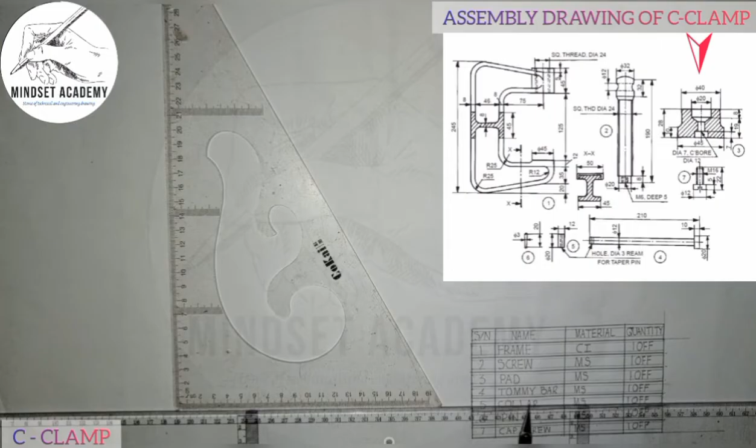Now item 2, where my arrow is pointing, is the screw, made up of mild steel, and we have one of it. Item 3 is the pad, made from mild steel also, one of it. Item 4 is the tommy bar, made from mild steel also.

Item 5 is the collar, from mild steel. Item 6 is the pin. And we also have item 7, which is the cap screw. All are made from mild steel except the frame, which is made from cast iron. And we have one each of these different items.

Now the first thing we'll do is draw our vertical line. We'll start from item 1, which is the frame, where my arrow is pointing, and I'll draw a vertical line this way from here. Faint line first, you can see that. If you look from here to here in the diagram, I call it the total height.

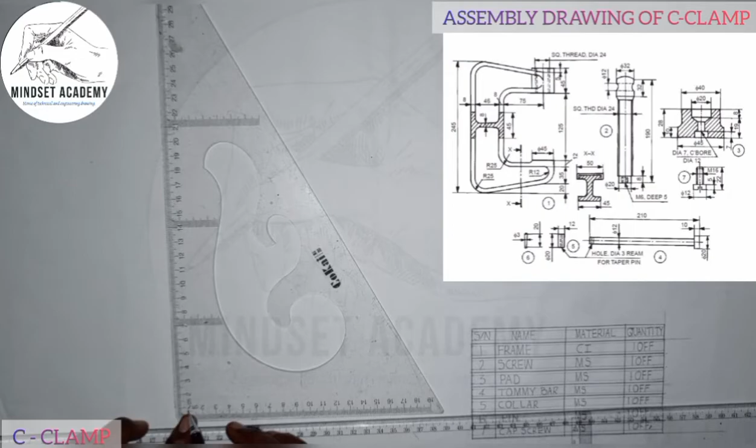It is 245. I'll start from here and measure my 245 upward. So if I'm starting from 1, taking my 1 to be 0, if I start from 0, I'd have stopped at 245. But since I'm starting from 1, I'll stop at 255 at this point here.

So 0 to 245, or 1 to 255. So this is the height, this is where I'm stopping here. So I will take my set square and draw a horizontal line here also. I'll come here also and draw another horizontal line too.

You can see that. Now the next thing is the total length. If you count from this point to this point is 8. From this point to this point is 45. And the next point is another 8. So 8 plus 8 is 16. 16 plus 45 will give us 61.

Now the next one again, from here to here, is 75. So 61 plus 75 is going to give us 136. Now that is to this center here, and we know that half of the center from here to here is diameter 45. So half of 45 is 22 and a half. So 136 plus 22 will give us 158 and a half.

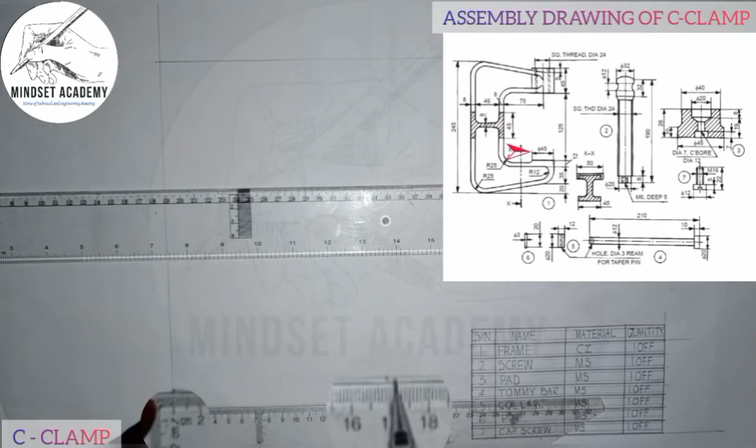And I will close it up this way. And I'm going to close it up this way.

So this is the form out of the box here. If you look at this closely, the thickness between here to here is given as 8. So I'm going to measure 8 from this point to this point, given to be 8. So this is my 8 here.

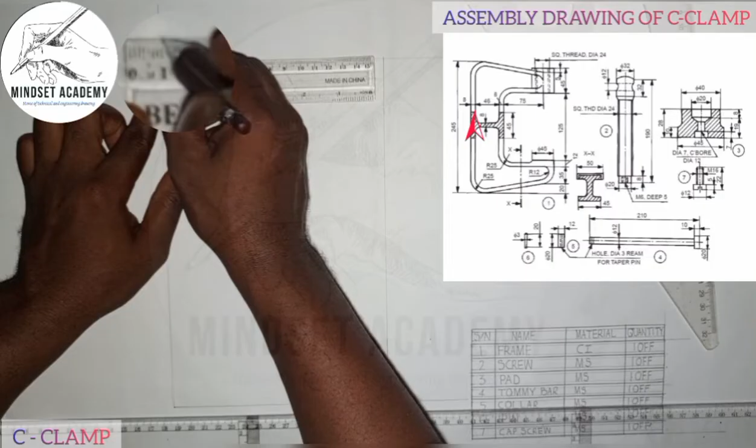You can see that, that is the height to have. And I am going to close it up. So from here to here is the 8. And I'll close it up. You can see that.

Now the next thing is, if you check from here to here, it's given to be 20, and I'm going to measure 20 from this point to this point, 0 to 20. And after that, I'm going to measure 35 again from this point.

Then I'll measure 12 again, from here to here. This is 12.

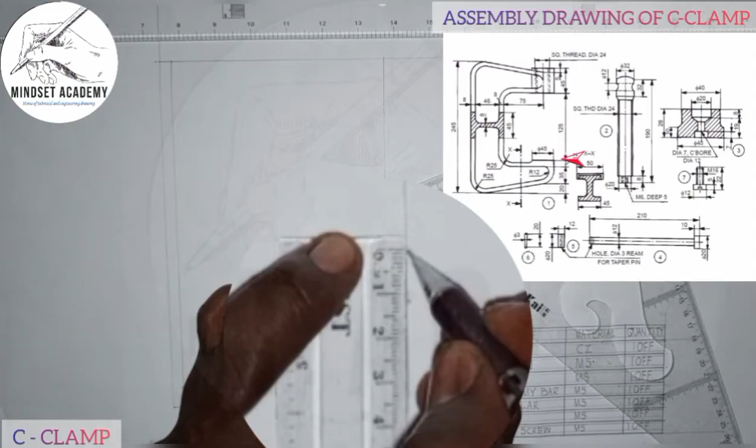So with what we have here, I will just draw my horizontal line this way, just a faint line first of all. So this is what we have here. Is that okay? So if I've done that, the next thing I'll do is this.

From the base here, I'm going to measure another 8, from 0 to 8. So this is 1, this is 8 here. This point is 8, right?

Now if I've done that, measuring the 8, this is what I'll do, and I'll take it to touch the point 20. I'll take this end here to touch the point 20.

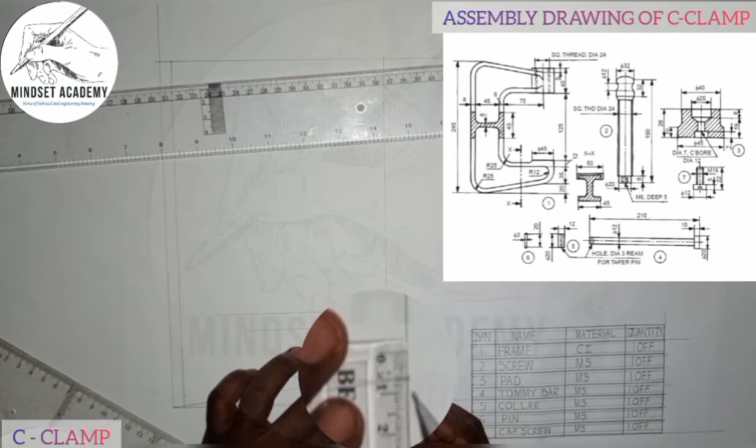You can see that. And I'll measure another 8 again here, this point, because the thickness is 8. So I'll measure 8 here. This is 8, right? And I'll measure 8 here too. This is 8. And I'm going to join those 2 points here.

You can see that. Now if you notice it, there's a fillet, it is not sharp. And we're giving the radius of this curve here to be 25. So I'll measure 25 on my meter rule this way, from 0 to 25. This is what we have here.

Alright, and I'll place it at this point here. At this point, I'll mark 25, and I'll mark here also 25. With the same radius, I'll place it on that point. I will strike an arc. I'll place on this point, I'll strike another arc again. You can see that, so where they meet at this point, with the same radius, I'll close it up.

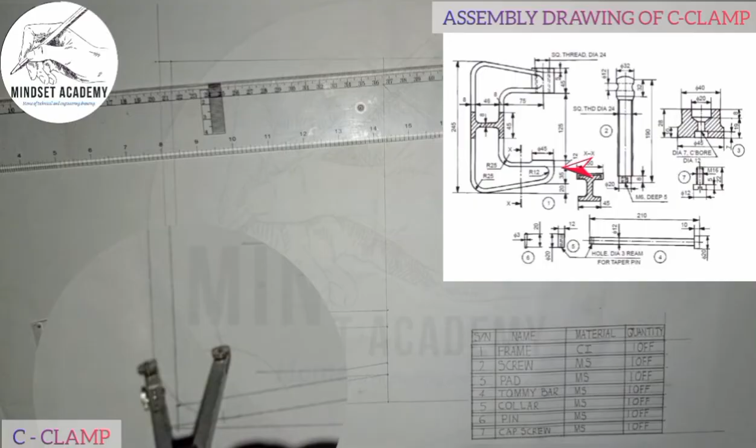So you can thicken it. You can see that. The same thing that I did here, I'll do it here too. From this point where they meet, I'll strike an arc here. I'll also strike another arc here. So where they meet here, I'll strike an arc. At this point here also, I'll strike another arc. So they are meeting at this point here, right?

So the radius of this, I'll take it here. I'll do the same thing.

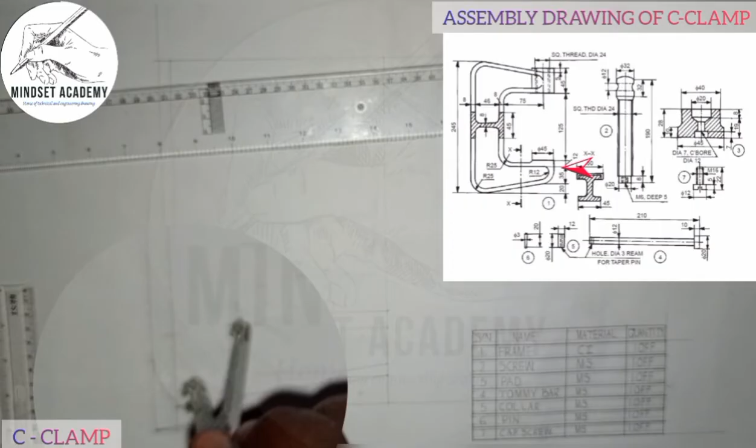You can see that. And if you check the diagram very well, at this point too, we also have what is called a curved fillet. Is that taken? So at this end point with the same radius, I use 25 here, and I'll come to this point where it intersects.

I'll mark 25, 25. Where it meets, I'll strike an arc. I'll come here, strike another arc. So where they meet at that point, I'll take my compass there at the point of intersection, and I'm going to do the same thing here.

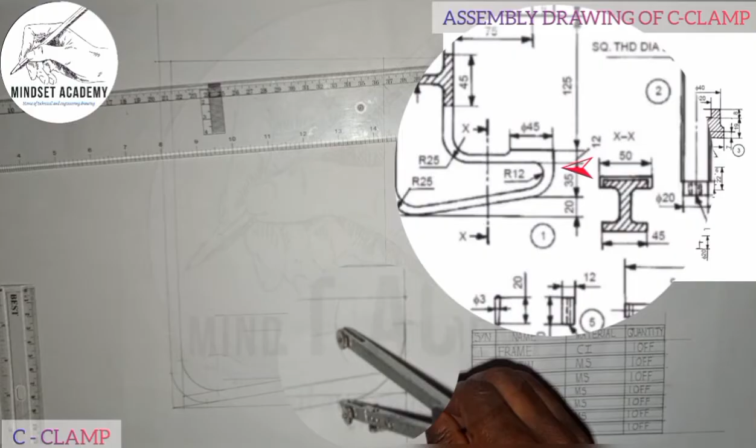You can see that. And I'll come here also, I'll give another distance of 8 here too. Let me do that, because the thickness is 8 from our diagram. So I'll just do this.

Now measure 8, to this 8 here, right? So from that point, I'm going to take it down with my set square, faint line first. So it is meeting at this point here, right? It's meeting here.

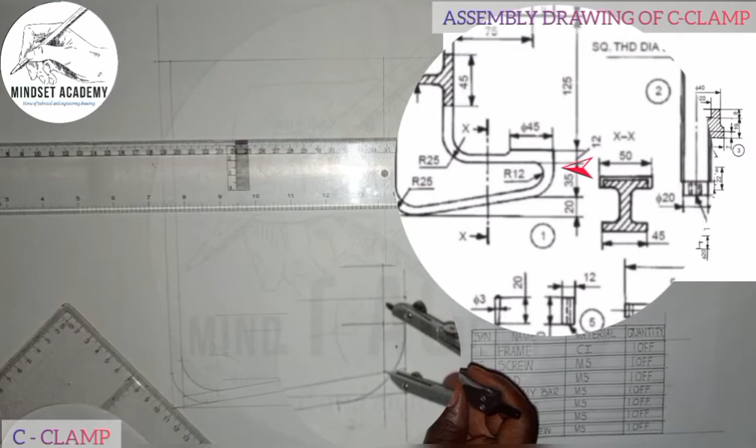So at that point, with the same radius of 25, I use 25 here. I'll place it at this point. I'll strike an arc here. Let me put it here. This should be this point, 25, and here also 25.

Right? Where it meets, I'll place it here. I'll strike an arc. I'll place it here also. I'll strike another arc. So where they meet at this point, I'm going to draw a curve this way.

Coming. So this is what to do to get that arc.

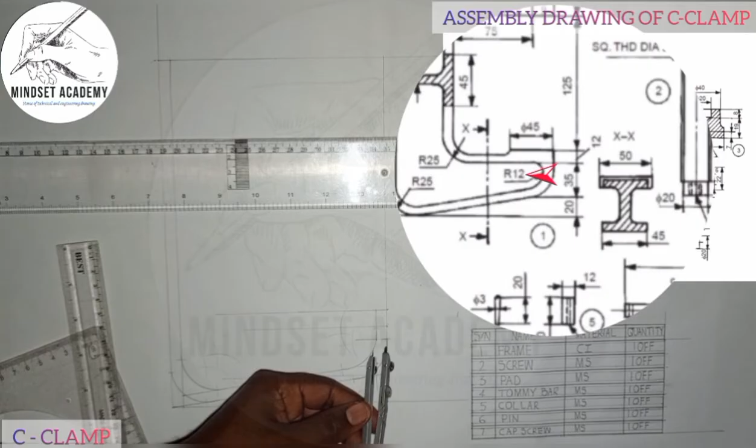But now we're given another one here, from here to here is radius 12. So I'm going to measure radius 12 from here, 0 to 12, and I'll place it at this point. At this point here I'll mark, and I'll come here also place it here in order to have my curve here. This is where I'm going to stop.

So at this point is where I'm going to draw my horizontal line. So at this point, where we mark 12, we'll just draw a line. This is where we'll draw our line at this point, so this is where we'll stop. So all this is not needed, I'm going to delete this off.

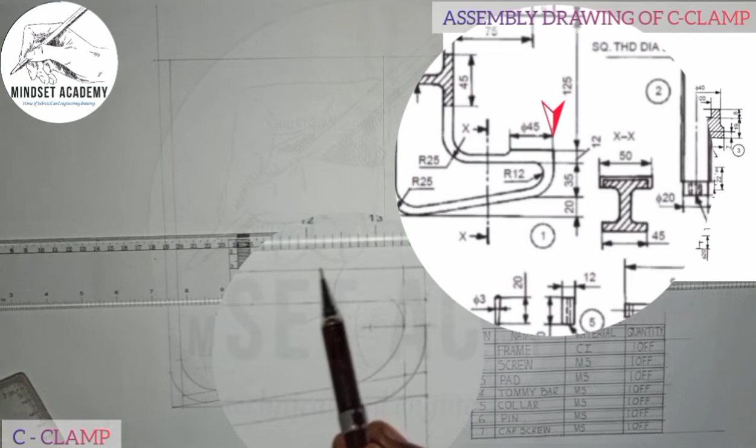Now from this point on the screen, to this point here, as you can see, is given to be diameter 45. So I'm going to measure 45 here. From here to here is 45, which I am going to thicken. From here to here is 45, so I'm going to thicken it this way.

You can see that, and in doing that, get the center point of it, which is 22.5. Now the next thing I'm going to do here will be from the center point here that I mark, from here to here is 45, and here is 22.5.

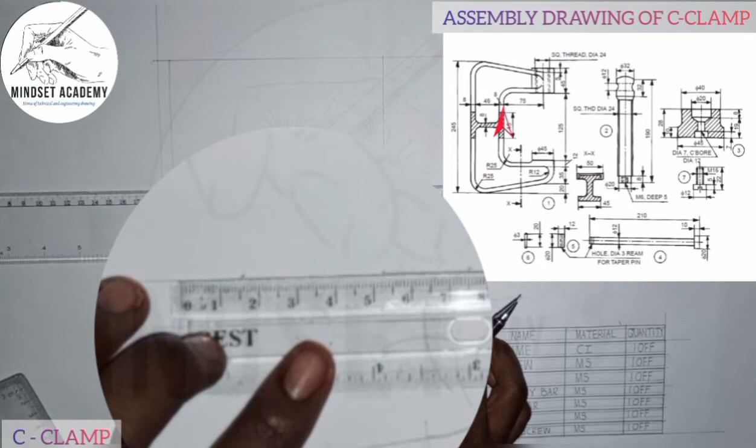You can see on the screen from this top here, I'll now measure 75 to the next line here. So I'll measure 75 from here, from this point. This is 75 here, that is where I'll draw my next line this way.

On that line, I'll now measure 8 as the distance in between here, 8. So this is 8 here. And I'll take it up this way, from this point, take it up this way.

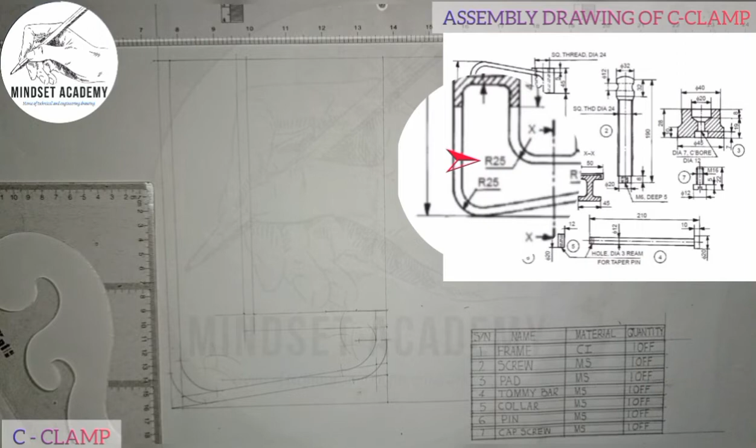You can see that. Now once I have done that, the next thing is we are given a radius where this meets and where this meets. So I'll take my radius here and mark a radius of 25, as you can see on the screen the arc here is radius of 25. So I'll measure radius of 25 on my meter rule, this is 25 here.

And I'll place it at this point here. Let me confirm that again. I'll place it at this point here, I'll mark 25, 25. I'll come here, I'll strike an arc. I'll come here, I'll strike another arc. So where they meet at this point here, I'm going to draw this arc.

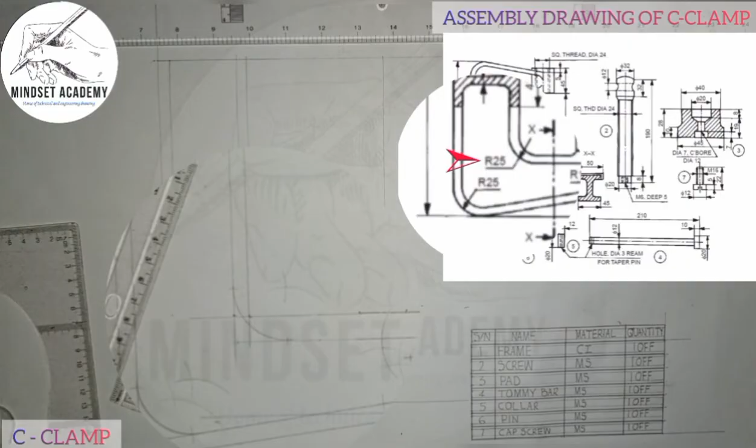You can see that, that is where I'm going to join this arc to, which I did here. So I will join this to that point.

You can see that. Now the next one is we are going to measure 8 from the base here because the thickness is 8. So I'm going to measure 8 from the base here, this is 8 here.

And I'll now draw my horizontal line there. You can see that? So it will be from that point now I'll take the radius of 25. The radius of 25 is the arc there, so from this point here I'll strike an arc up and I'll strike it down.

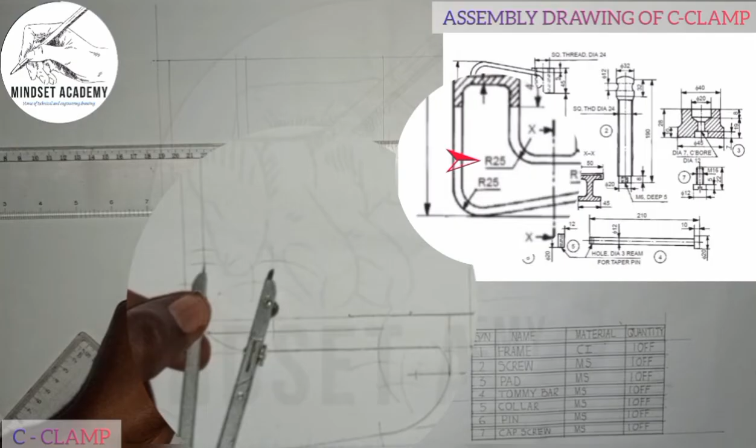Where it meets, I'll bisect. Where it meets here, I'll also bisect. So where both of them meet at this point, I'll now draw my arc.

You can see that. So with the help of my pencil, I will draw an arc here at this point. I'll bring it down because if you look at the diagram where my arrow is pointing, it is also a fillet here.

So I'll just take my compass with the same radius I used here. I'll bisect here, place it here, strike an arc, place it here, strike another arc. So where they meet, I'll get that arc here.

You can see that. So in doing that, I'm going to connect these two points together, these two to this. You can see that, so I'll now join from here to here. You can see that, so we'll move forward.

Now if you look from this point to this point is 125. So I'm going to take my meter rule and measure from this point here straight down to this point, 125, and that is where I'm going to draw a straight line this way, bend line first of all.

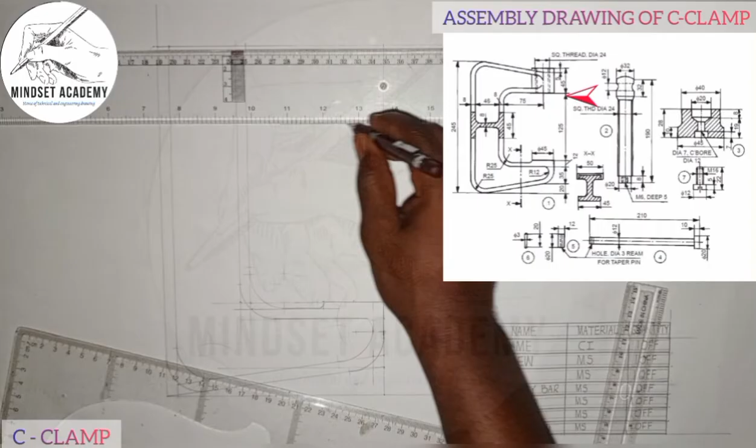You can see that. Now if you look closely again, the height from here to here is 45. So I'm going to measure another 45 from this point here, this is 45 here, and I will just draw another horizontal line there, this way.

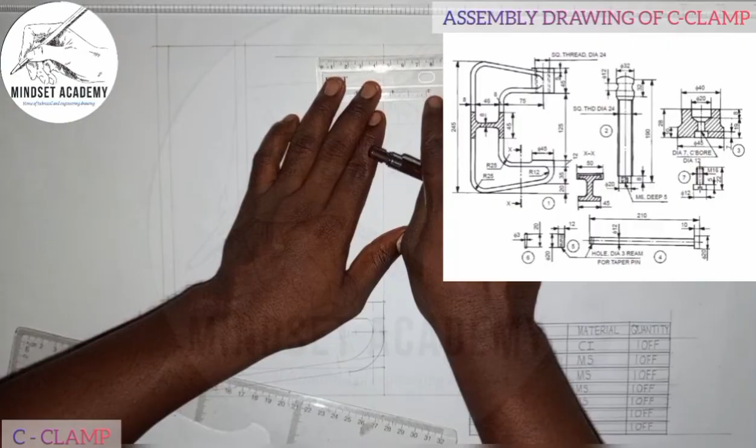You can see that. Now the distance from here to here is the same distance from here to here, and that is given as 45. So I'm going to measure another 45 from here, this is 45 here, and I'll close it up.

You see that? Now what I'll do here is take the last point, as you see in the question. I'll take the next point here, which will be the center. This line here is the center, that is where this arc is touching. So I'm going to measure that center line. We know this center line is half of 45, which is 22.5.

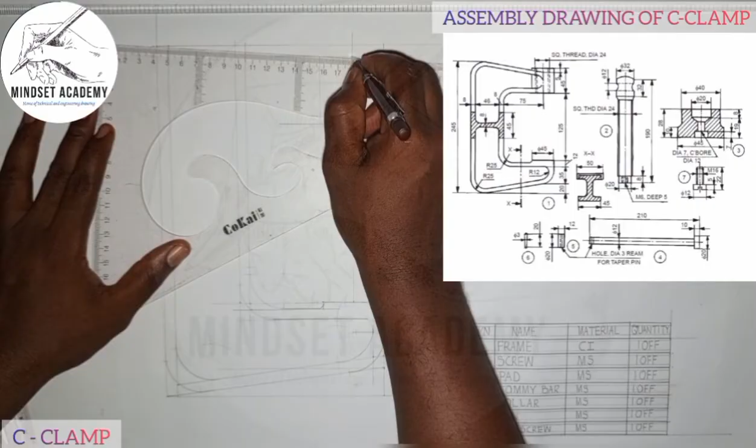I'll just take it up from this point here. So once I've done that, start taking it from where this point meets here. I'll draw the line from here to touch that point, this outside one here. I'll draw it from here to come and touch this. You can see that.

And I'll measure another 8mm from the top here. This is 8 here, you can see that. So from that point, I'll draw a horizontal line here a little bit, from this point to this point, but I'm going to measure 8mm downward. This is 8 here. So I'll connect this point to this point.

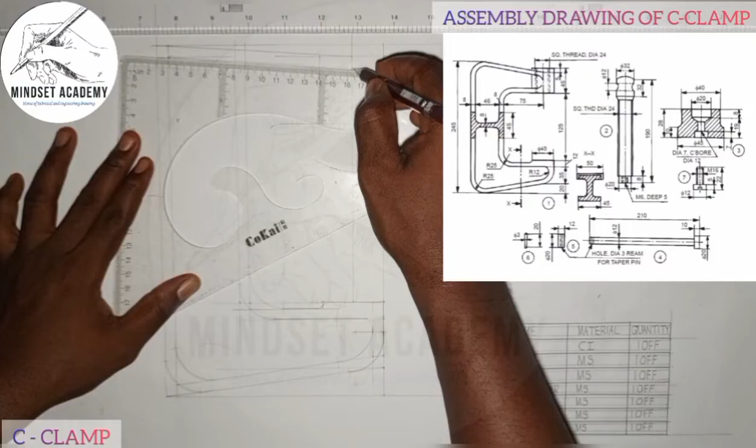You can see that. So what I did here, I'll repeat the same feat. This point here to here is a radius of 25, right? I'll come here with the radius of 25 too, and I'll place it here too. I'll mark on this line 25 here and 25 here. I'll place it here also with the same radius and cut at this point. I'll place it here and also cut at this point. So where they meet, I'm going to get the other arc here.

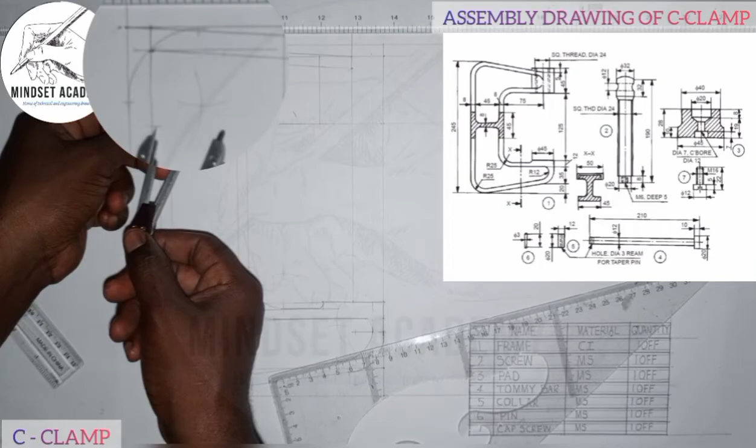You can see that, and I'll do the same thing here too. At this point, I'll mark 25, 25. Where they meet here also, I'll place it here and strike an arc, then place it here also and strike another arc. They are meeting at this point here. So I'll take my compass with the same radius to those 2 points, then I'm going to draw my arc.

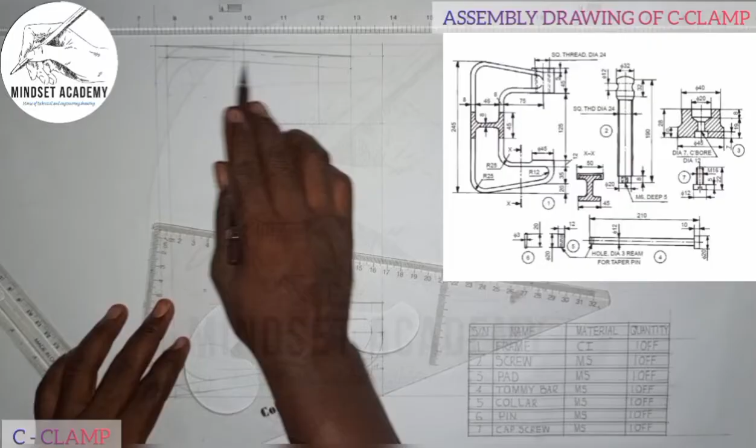You can see that. So what we have here is going straight down, which I'm going to thicken. You can see that. And the other one, before I do that, I will first of all treat this.

This point here, I'll project it. It's touching this point on the screen, so I'll move it to touch here, the first line. So if I move it, that is the length of 45. It's touching here. Then from that point, I'll measure another 8 millimeter upward because the thickness is 8 millimeter. This is 8 here. And I'll do another one again, the center line.

But before I do that, if I draw this bend line, I'll just draw another line in this way. You can see that. So with the same radius of 25 also, I'm going to place it here too, because all this area has the same radius.

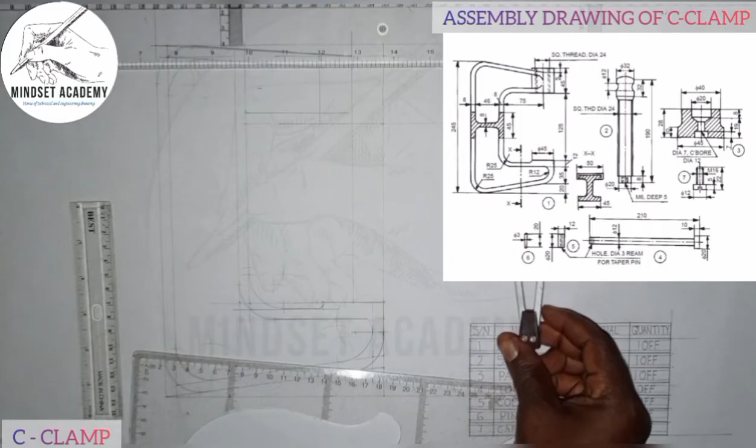So I'll come here, let me take this to the back here. Take this to the back here. So where this is, I'll bisect here with a radius of 25, and also bisect here. The same radius, I'll place it here and strike an arc. I'll place it here also and strike another arc. So where they meet at this point here, I'm going to draw that curve. I'll draw the curve this way.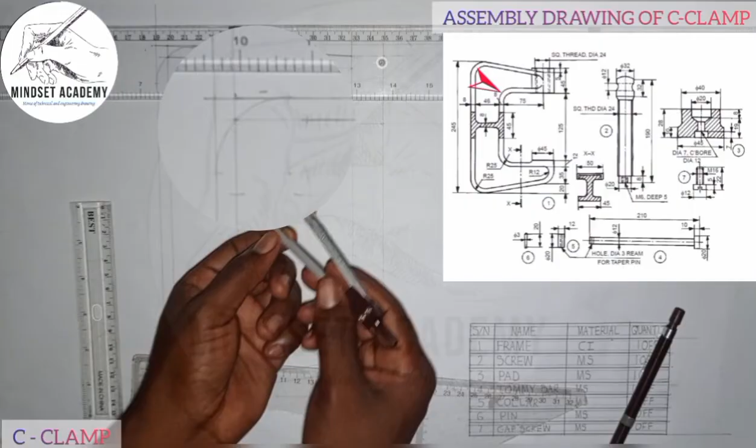You can see that. And I'm going to do the other one too. From this point where this line and this line meet, I'll do the same thing. Cut here, I'll cut here. I'll come here also and strike an arc. I'll come here also and strike another arc. So where they meet at this point, I'll do the same thing. You can see that.

So with that, if you look at the diagram very well, there's a curve here. So what I'll do is bisect these 2 points here to get the center. Strike an arc, bisect here and here, place it here also, strike another arc, bisect here and here. So I'll take my compass and rule and join the two centers, not really joining them, just to get the center of this point. Just draw a straight line this way. From that point, at the center point here, you take your compass to this point, and you draw your arc. I'll be touching here.

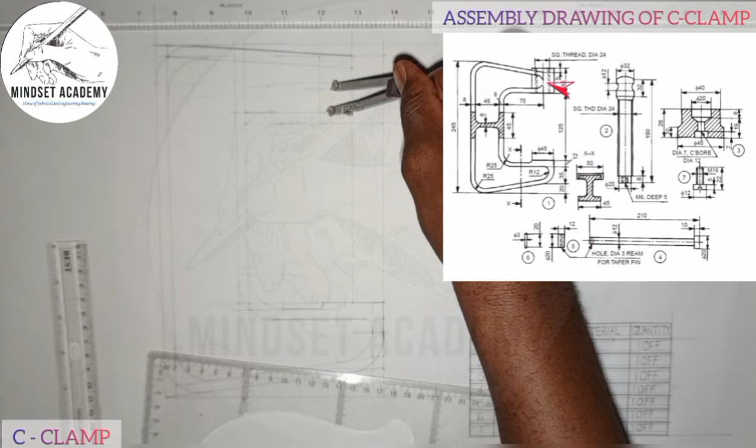This is what we have here. So I can now take in from this point to this point, right? I can also take in from this point to this point, right? And we'll proceed, we'll come in.

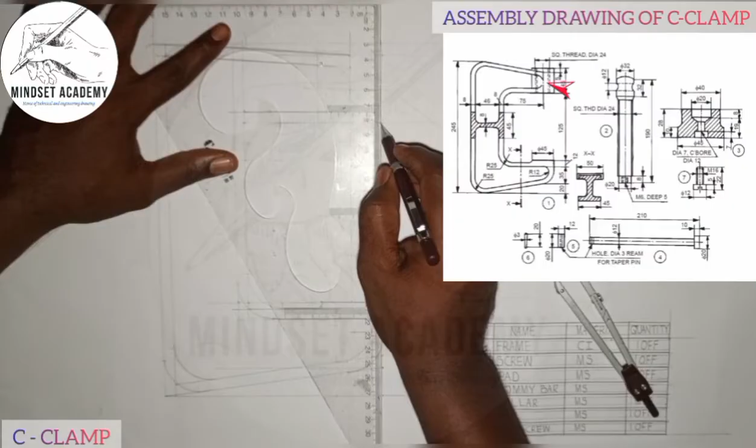So I'll start taking all this point here. If I take in from here to this point, then I'll close it up, and close it up too. Then I'll close it too, a little bit. Right? And I'll close it up too.

And before that, again, you can see that we have at this point a component here, which is 45 mm apart, and that is still the cross section of this figure. So what I'll do is I need to get half of 245. Then half of 245 is 122.5. So if I take my rule and place it at this point here, I'll measure 122.5 here. So this is 120, this is 121, 122.5 here. That is the center of this figure here.

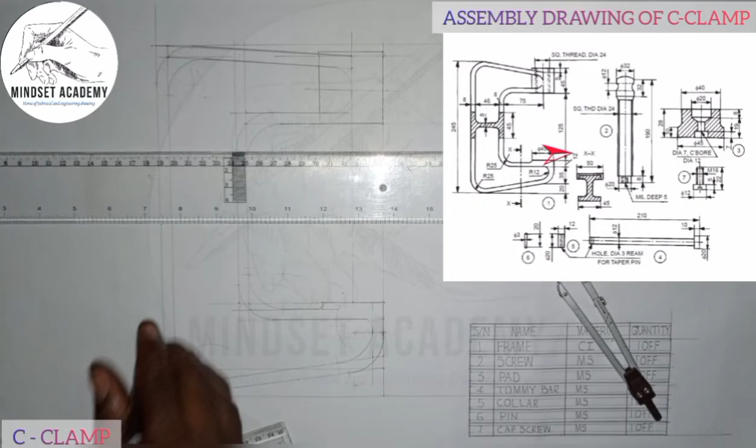Right? This will end up with the reference line first. So from that point, I'm going to measure 45 up and down. So that is 22 and a half up and down. So we know that from here to here is 45. So I'll just take half of it, which is 22 and a half, or you measure it on your meter rule, and you place it at the point here. You mark it up, 22 and a half, 22 and a half.

Right? And the thickness is 8. So I'll take 4, so if I should measure 4 each, from 0 to 4, and I'll place it here. I'll mark 4 here, and I'll mark 4 here. Now what I've done, I'll just join these 2 points together here this way, and I'll join here to this way.

You can see that. And the next thing I am going to be doing here is I'll close it up too. Just close this point up here, and close it up to here, this side too, here, and here. So I'll have to, there's a fillet here.

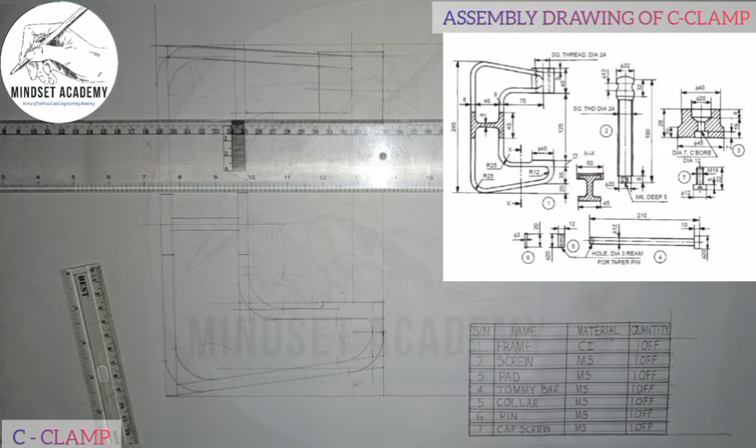So with that same 4, I'm going to draw that curve there. So from here to here, right? From this point to this point, you measure your 4 here, 4 here. And from this point, you strike your arc. Here also you strike your arc.

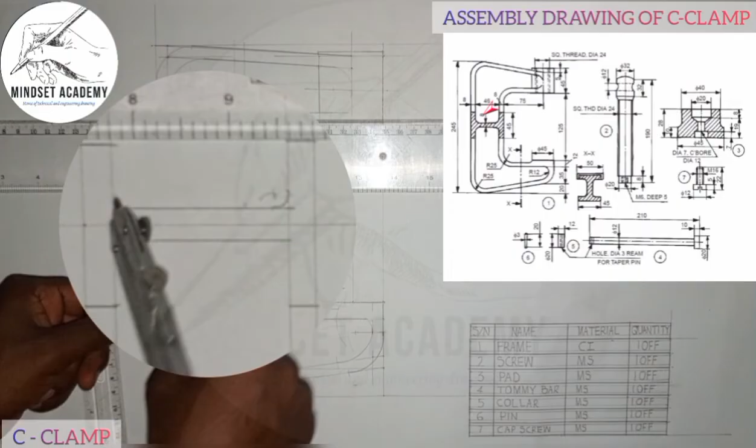Where they meet, you're going to have this. So see that? You're going to have that. You come here also with the same thing. Cut an arc, strike another arc from this point. You cut here from this point. You cut here too. Where they meet, you get the other curve here too, this way.

That's what you do for everything. You can just close it up. You can take it from here to here. You do the same thing here too in every point. So if I do that, I'll be having a curve here, another curve here.

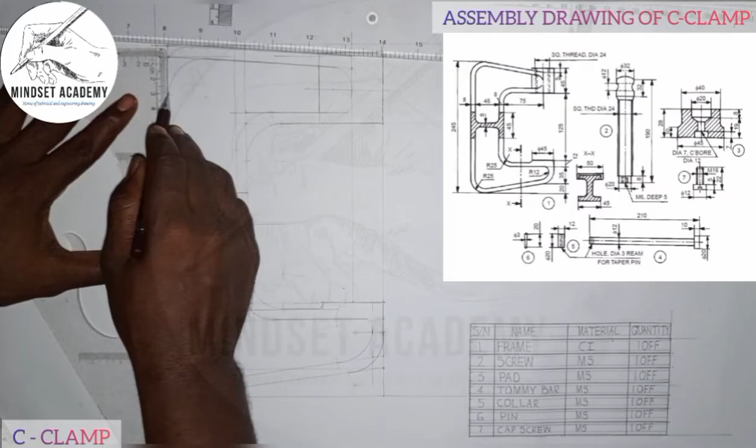So I'll close everything up here. So now from here, just close from here up. And from here too, I'll just close it up. See that? From here, I'll close it up, then close it up. Here also, just close it up.

Right? And you can easily section this part as shown in the diagram here. A section here, as shown in the diagram here.

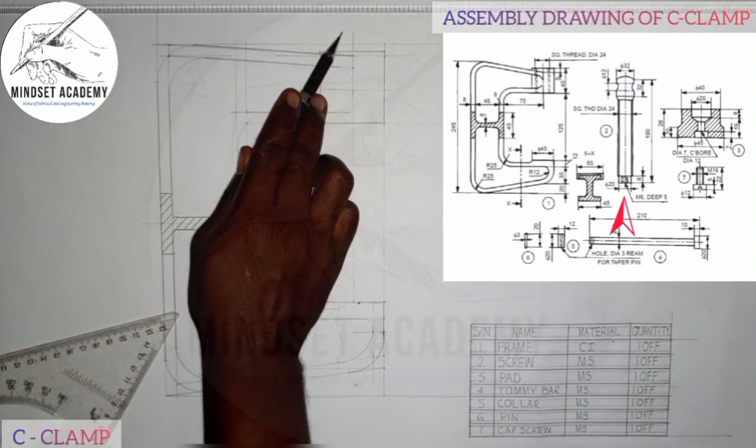You discover that item 2 is penetrating item 1. How did I know that? The reason is this: if you check here, we said square thread diameter 24, right? And if you check here also, we have square thread diameter 24. So meaning that this component is entering this component here. Is that okay now? So it is entering it. So I'll just put it in this way.

So I'll measure 24 at both sides, 12, 12 each. So I'll take my compass and I'll measure 12, 0 to 12. You can see that? And I'll place at the center point here. I'm going to mark 12, 12. You can see that? Then I'll draw it down using my set square.

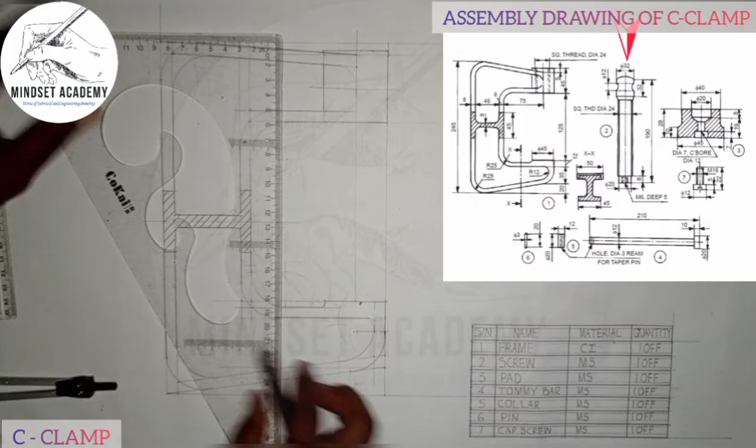I'll take it down using my set square this way. From here, just a faint line first of all, faint line first of all.

You can see that? The next thing I'll be doing here is, we're given that at the base, the height from this part here, I'll just draw a horizontal line. Anywhere I like, anywhere of my choice. Let me take this down a little bit so you have a feel of what I'm trying to draw. So I'll draw a horizontal line at this part, this way.

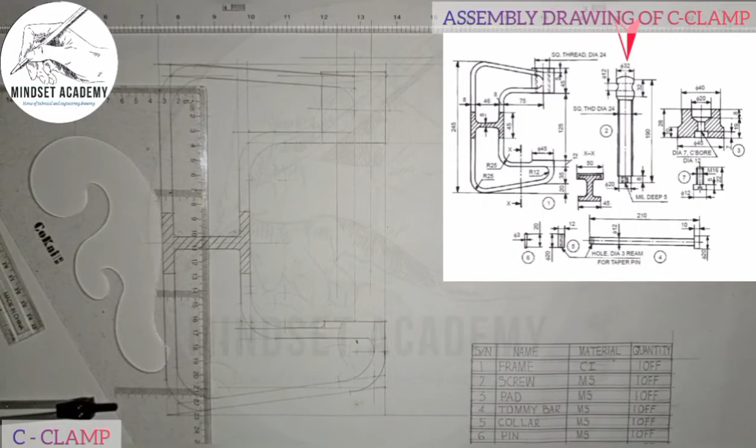So after that, the height, I'm going to measure 32 millimeters upward. But before that, 2 millimeters - what I'll do here is take my 45 degree set square, right?

You can see that? I'll place it in this manner, and draw a line this way from this point, and draw another one away from this point. I can draw at any given radius, maybe 2 millimeter, 5 millimeter, any of them.

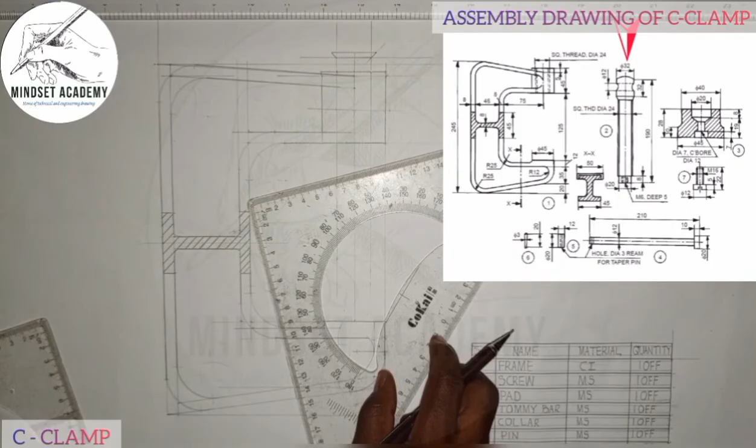I'll just connect these 2 points at any given radius of your choice, since it is not given. I can easily take in here, and here, and close it up here. Then the rest will go up again, start again, to go up a little bit more. This is not given, so I can decide it to be this. Now there's a hidden line here.

The thickness there is going to be 12. Diameter of what? 12. So measure 12 from here - that is given. So I'll take my meter rule and measure 12. So this is 12 here. I'll close it up this way, with a dotted line.

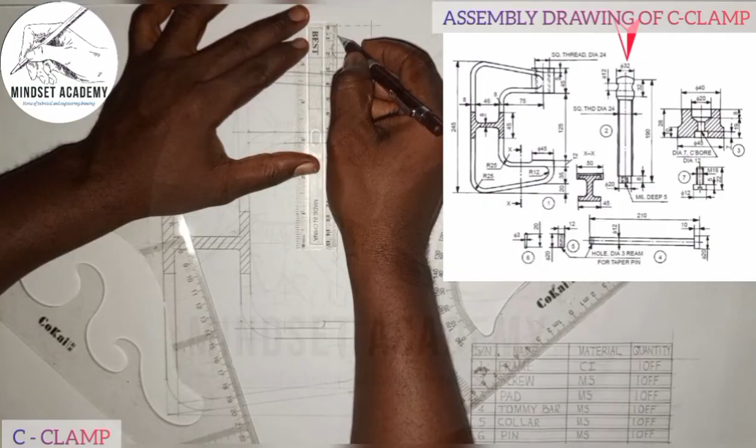To get the center there, if it's 12, then the center that we have will be a curve. So I can take the center - half of 12 is 6. There's 6 here. So if I place the compass this way... which I don't really have to do. One thing you need to understand is I'll leave that space there, first of all, and come back to it.

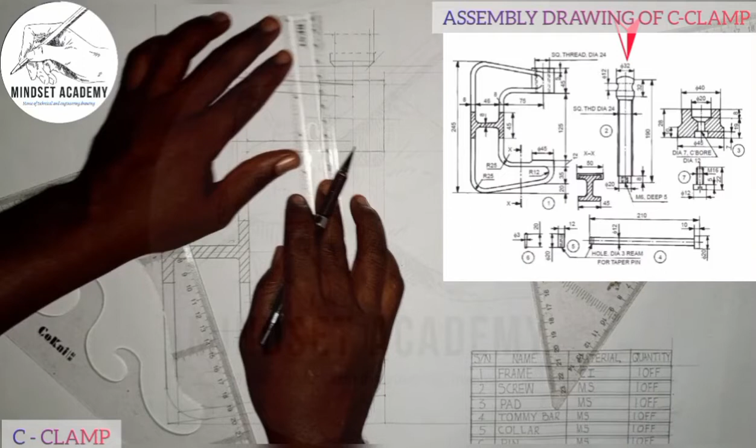Now the next one we have here is from this point to this point is 32. From here I'll measure 32 upward, then just take that up. So I'll measure 32 from here. These are the two here.

Can you see that? So after that, I'll just draw my horizontal line this way first. Now bring the other one up this way. So what I'll do is take the center of this line, which is this, and take it up. This is where it is.

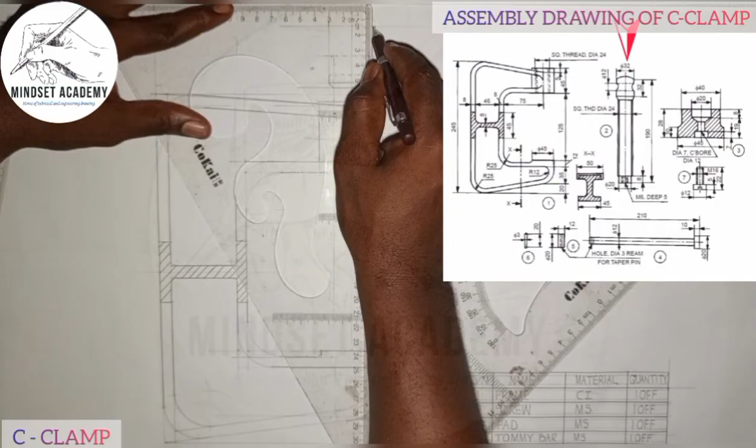Now you just take this up a little bit, maybe a little, and transfer the point here too. I take it a little bit up, and take the radius of 32 and draw that up. So again, you place it anywhere you want to, and draw from this point here. This is what you have here.

So one thing you need to understand is item 4 is going in through here. If you look closely, item 4 - how did I know that? The diameter there is 12, right? And the diameter of item 4 is also 12. So it is what will enter here that you'll be spinning. I'll just put it here and draw it this way - it's going in this way.

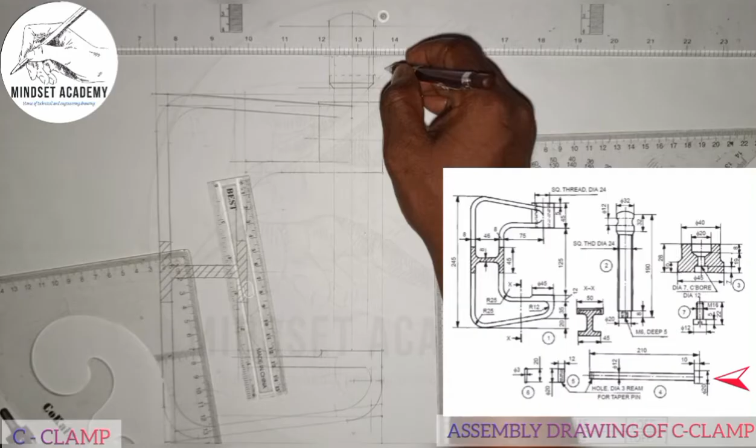Take the entire length to be 210. So I can start from anywhere and I'll measure 200. I can start from here. This is 200 here. Here also the same thing. You see that?

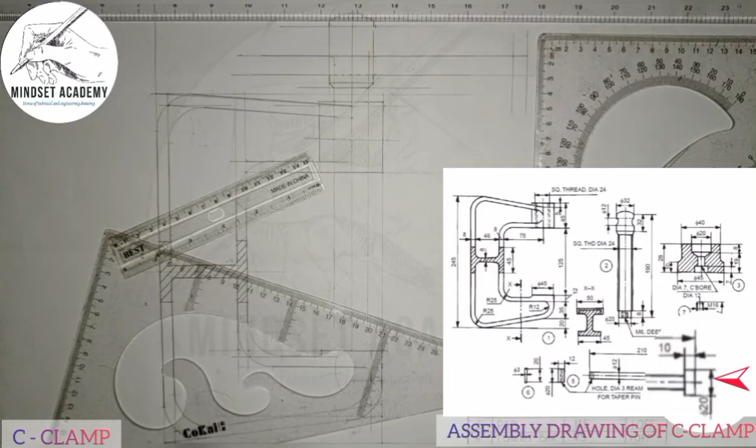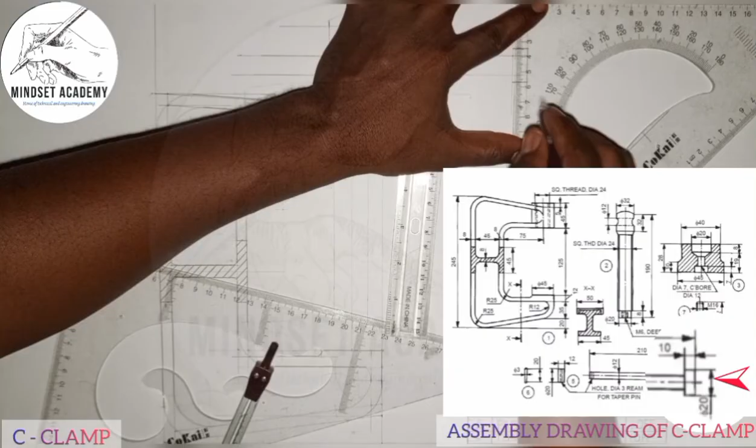So that means the height here, I'll take this and measure 4. This is 4. I'll come here, mark 4. I'll come here also, mark 4. I can easily close it up - if to this, I'll close it up. And I'll close it up too, and here too.

Then the rest will be going in to where the screw is. So this will be coming in here, and here too. Now close it up. I'll close it up. Right? This is item 4.

I don't really need to see this if it's passing through the figure, except you are sectioning - so let's remove that. Don't forget there's a curve here. I can just put that here - the curve that we have here.

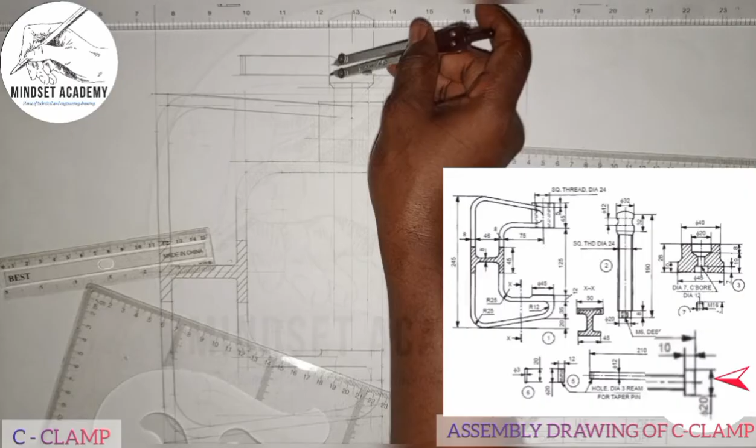So it's going in, right? Just like the question suggests. So the rest that we have in here is just what we have here. So I'll just stick in the rest.

And the rest will come. So this is item 4, which is the tommy bar, right? So let me put the center line here. This is our center line. That's the tommy bar, so we're taking it downward.

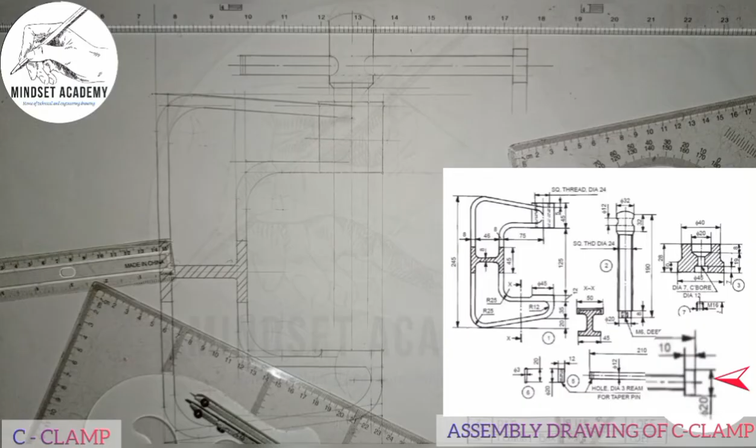So the entire height from item 2, from the top here, straight down is 190, right? 190 from here, so I'll stop at 200. This is where everything ends, so I'll just draw my line this way.

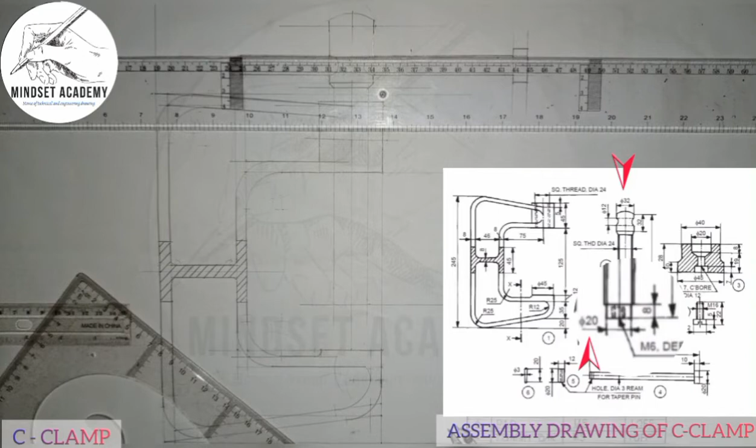You can see that? Then if you look at that base here, we're having a diameter of 20. And if you're looking at this point where my arrow is pointing at item 2, diameter of 20. And also we have a diameter of 20 here too, at this point. So it means that item 2 is entering item 3 at this point here.

Is that okay? So I'm going to fit item 2 into item 3, right? So from here to here is going in, so I will measure 8 millimeter upward this way. This is 8 here, and I'm going to draw my horizontal line at that point.

So at that point, I'll measure diameter of 40. From here to here is 40, so I'll take half of it, which is 20. This is 20 here, and I'll place it at this point, and I'm going to mark 20, 20. You can see that?

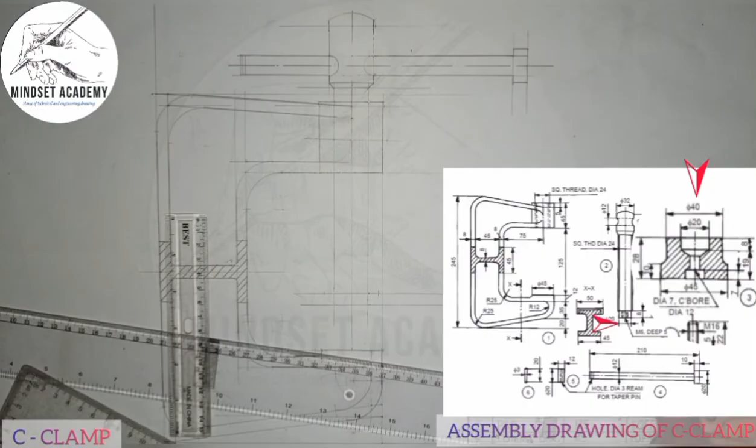And also I'll take diameter, I'll bring it down a little bit, but before that I'll take diameter of 20 again, then I'll take 10, 10 again here. Measure 10, I'll come here and mark 10, 10. So that point where I mark diameter 20, 20 here, I'll just take it down. Faint line first of all. Downward, then here also downward.

So the entire tip height here is 28, so I'll measure 28 from 0 to 28 here, right? And I'll close it up, either 0 to 28, I'll just close it up this way. I'll close it up this way.

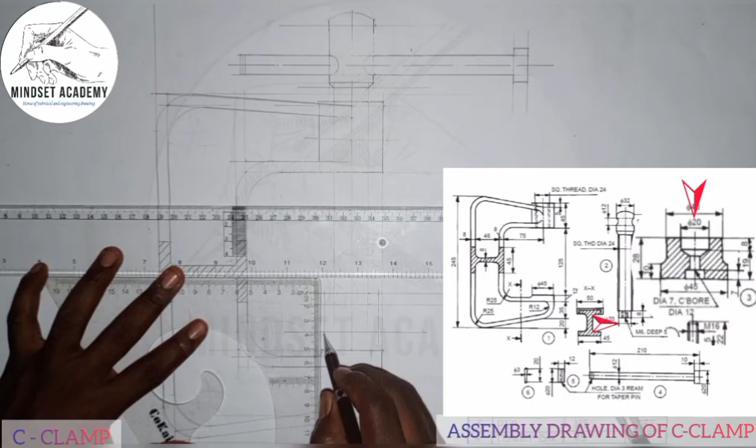And I'll measure half of 45, which is the same thing as you see here, right? So it means this is ending here and this is ending here. So I can easily, item 7, which is the cap screw, is going in here, right? So what I will simply do here is this: I can easily take in all this point here, from here to here.

And the cap screw, the diameter of the cap screw is 12, so I'll measure 6, 6 each. Since the diameter of the cap screw here is 12, I'll measure 6 from 0 to 6, and I'll place it here, and I'll mark 6 and 6. You can see that?

And I'll take it in with 5 millimeter, let's just take this in a little bit. So I'm just redrawing component 3, what I'm doing, and the height is 5. This is 5 here, right? So I'm going to close that up this way.

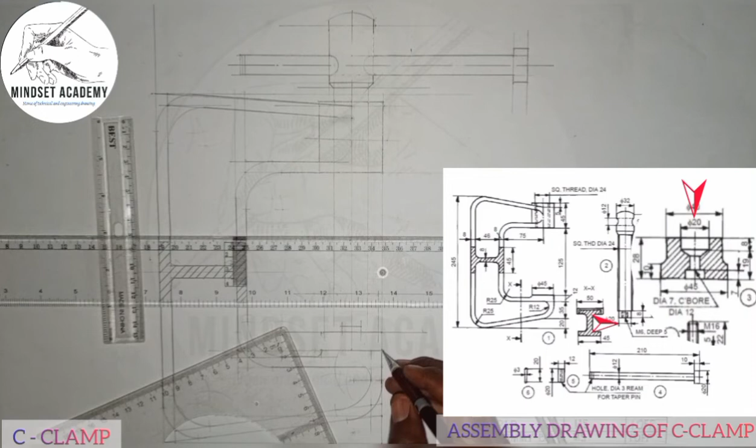That again, and from here it's connected to this up here. So how will I do that? This is what I am going to do. It is M16, right? So if you multiply M16 by 1.5, we'll be having 24, right? But if you look at the thickness from here to here, it's giving a diameter of 12.

So what I will do is I'll just measure the 12. The 12 is going in here, the 12 is going in here. So I'll take my meter rule and I'll measure 6, 6, which is what I've done already, right? So I'll just take it in from here to here.

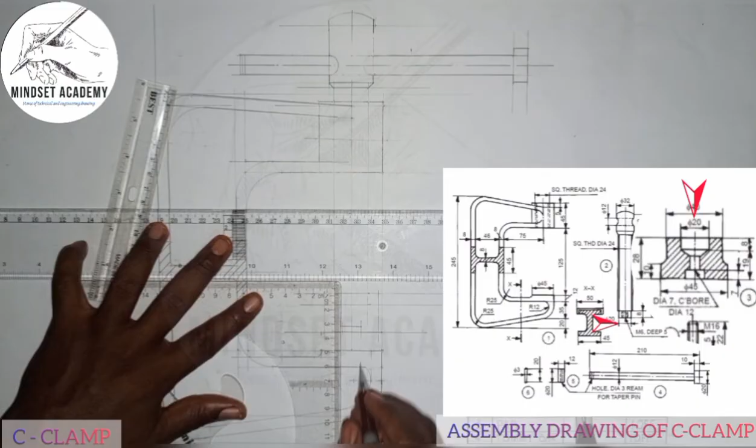The height of 10 from here upward, first of all, this is 10 here, and I'll close it up. Faint line first, so it is meeting at this point and at this point.

So I'll use my compass to draw that fillet, meeting here. Right? And I'll come here also, I'm going to do the same thing where they meet here. I'll mark here and I'll mark here, place it here, check and arc.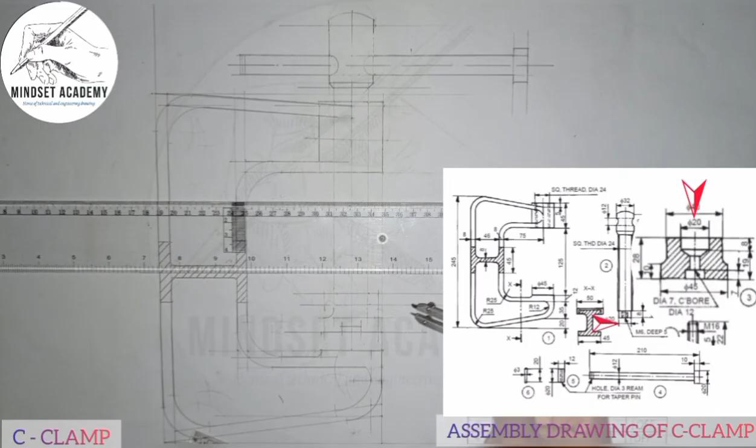And talking about here, this is coming down from here to here. That's what I'll do, place it here, check and arc, place it here, check another arc. Where they meet, I'm going to have this. So I can start taking some of them here.

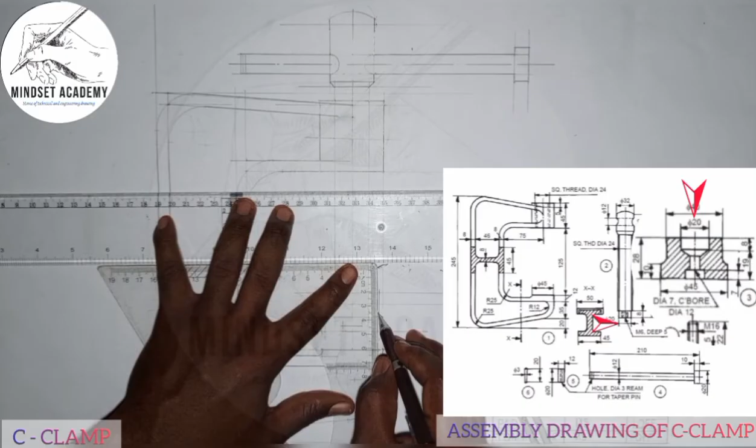So I measured from here to here to be diameter 40, so I can bring this down, and bring this one down too. This side is chamfered, as in there's a fillet here and also here too. So I can take it up, and take this up too.

I'll close here down too, and close it down too, and here too. What else do we have here? We'll close here up to this 20 that we measured, from here to here and from here to here.

And we'll bring it into a height of 19, from here to here, 19 from the base. I'll measure 19. So this is 19 here, which we've done. Then this is what we'll roll, and I'll roll it down to touch that line of 19. From here to come and touch here, from here to come and touch here. That is height of 19.

Then it's going in and I'll close it up. Close it up.

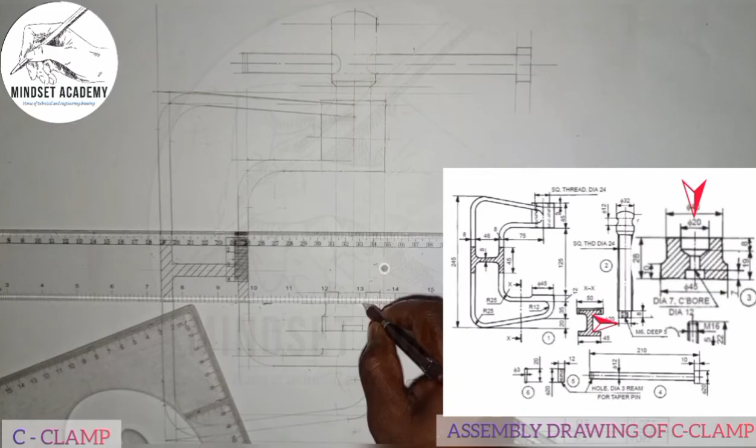So with the help of my 45 degrees set square, I'll take it in, from this point here. Take it in, I'll go here too. I'll take it in. All good.

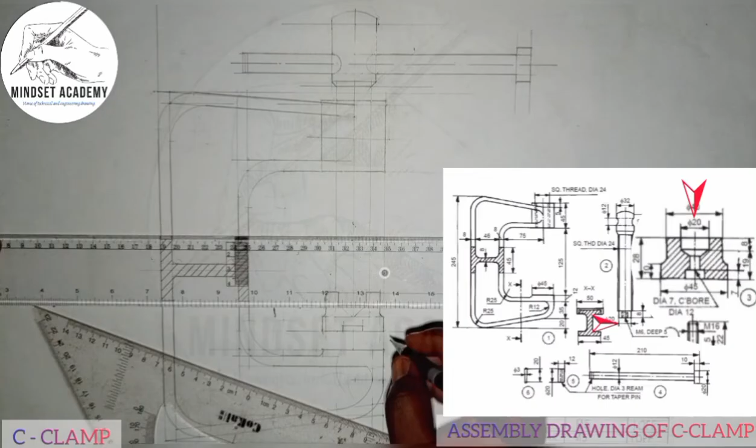Then I can easily close it down a little bit because of the thickness here. Let's close it up. Then I'll bring it down, because that thickness there is given to be what? 12. So 6 you're going to measure there.

Let's take it down, here down. So the screw is coming in here. So this is our screw here, that is the cap screw that is holding this component together. I can easily thicken this from here straight down, and this from here straight down.

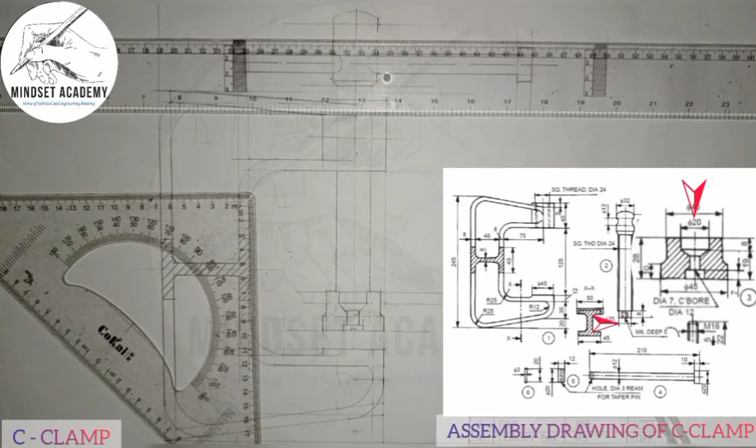So I'll section it because the question says we should section. So I'm going to section at this point too here. So we'll section that part because that part here is what is sectioned.

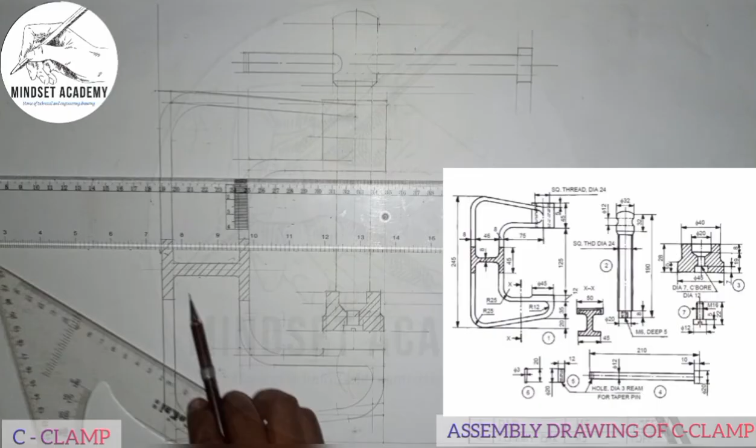Now the next thing that we will be doing here is, because we sectioned it, that is why all this is showing. If we didn't section it, all this would not show. So it means that automatically this will be going out through this way.

So because we section them, I'll be drawing this, and I'll section it also. So if I'm sectioning it, all this will be off. This line will not be there. Without section, this line will be there, but with section, this line will not be there.

So let me just close it up. Just have that in mind: without section, all this would not be there. So let me clean it off and section that. All this will not be there too.

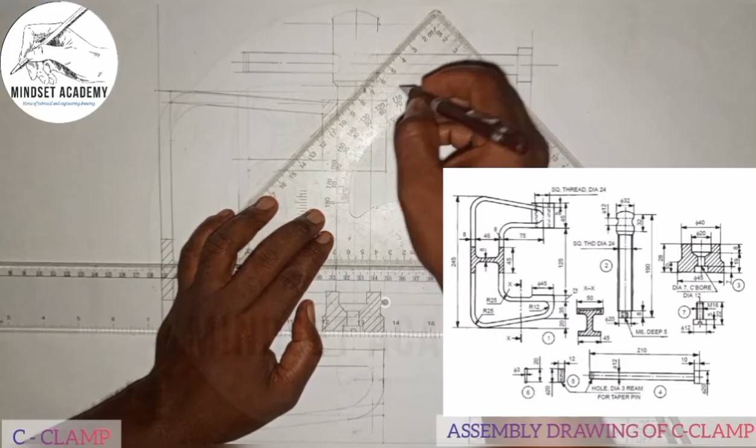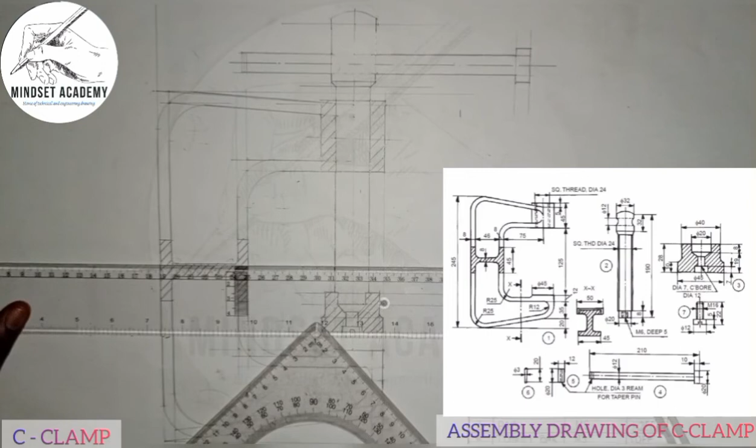We don't only section the bolts and the nuts, we are also going to section this part too. So here we'll now go through. I will not see this because I'm sectioning them, so I will not see these two places. Let me remove that. So this will be going through. Let me section.

So this is what we have here. Once you section that, start taking it. Once you section that, this is what you're going to have. So if I'm to label them, this you see here is item 1, right? This is item 1.

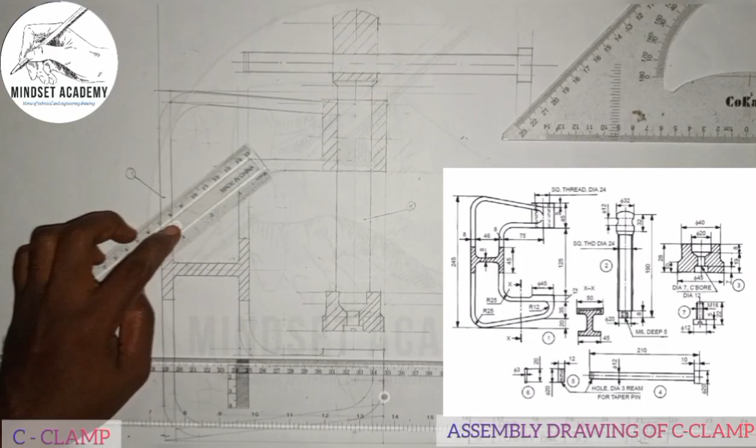I'll just put it here. This is item 1. Then this is item 2. Then this is item 3. Then this is item 4. Then item 5

is the pin, is the collar here, right? So we have what is called item 6, the pin. Then we have the cap screw, which is item 7. This is item 7 here. Then we identify here.

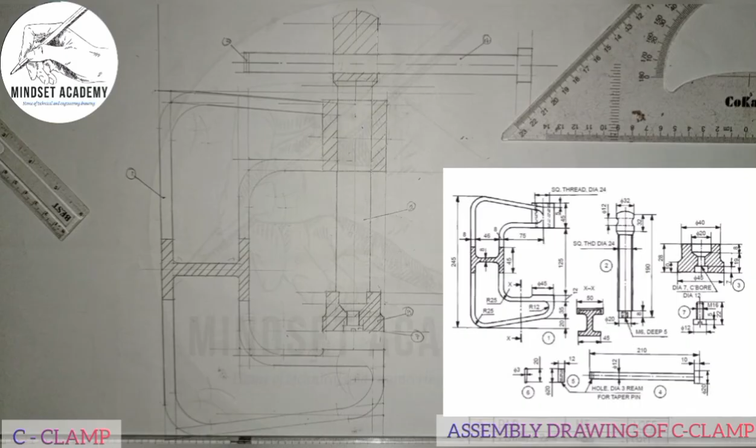So what is again? And that's what we have here. This is what we are told to draw, right? This is the C-clamp that we have assembled.

So I believe this has enhanced your understanding and you have a better view of how to assemble a given machine part or given components, right?